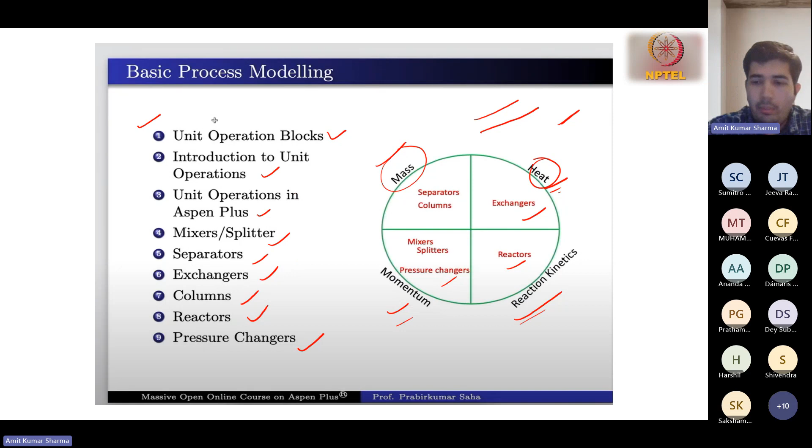This is the picture in which you can see the blocks. Just let me take you to the actual Aspen software. Let me share my Aspen screen.

Is Aspen visible to you? Yes, sir. Okay, thank you. So this is what you see when you open Aspen Plus, I'm using version 12. This is the window. Last time I was not able to access Aspen, but now I'm able to do it.

Let me first start with the help section, actually it's very important. You can see in the rightmost top corner there is an option for help. If you click on it, there will be a complete help section — basically a manual for the complete software. In this manual you can find help regarding any query, and you can also use it to understand more about the property methods, the simulation environment, and the blocks.

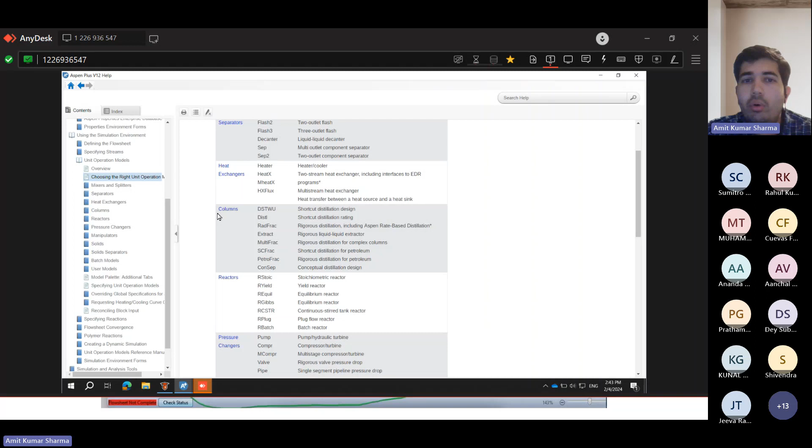Then separators, so we have different kinds of separators. Then heat exchangers, so you can get so much information about all these things. It's like a manual. Just click on mixer and you will get further information. Further, you click on it, then you get more information. So this is the help you can use.

So let's go to a new file. Here we can specify the components.

Just specify like air and water. You can specify any component here. Just type it if you know the exact name. Otherwise, you can click on the find button and find it here. You can find with molecular weight, you can find with boiling point. So you can do your find here.

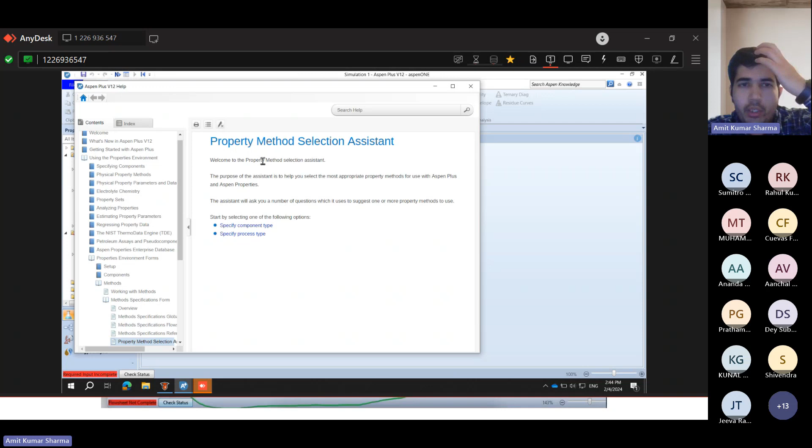After that, just click next. So then it will come to the next required input. Now you have to select the property method. This is the property method; you can also use the method assistant. If you click on it, it will ask you some basic questions.

Like if you're not sure which property method to use, you can use this property method assistant. Specify the component type or process type. If you know about the component, select this option; otherwise, suppose I know the components, you select this option. So suppose my component is a hydrocarbon system. Does this mixture contain petroleum assays and pseudo components? Suppose no, then you select further. These are the best options you can use, like Peng Robinson and others. If you click further, it will show you all the detail regarding it.

So if you're not sure about the exact property, you can use this method assistant. Just select your NRTL, okay, then next.

So now your property specification is complete. Now go to the simulation window.

Here you can see the model palette. At the bottom you can see mixer, F split, there is a model palette. Here you can see one is mixer splitter, then there is separator with different options, then exchangers, again different options, then columns, reactors. So in today's class we will cover mixer splitter, separator, exchangers, and columns.

So in mixers you can click on it, just drag it here, it will come here. Then you can connect with the material stream and all. You can see there are red arrows and blue arrows. The red arrows mean you have to connect a stream here.

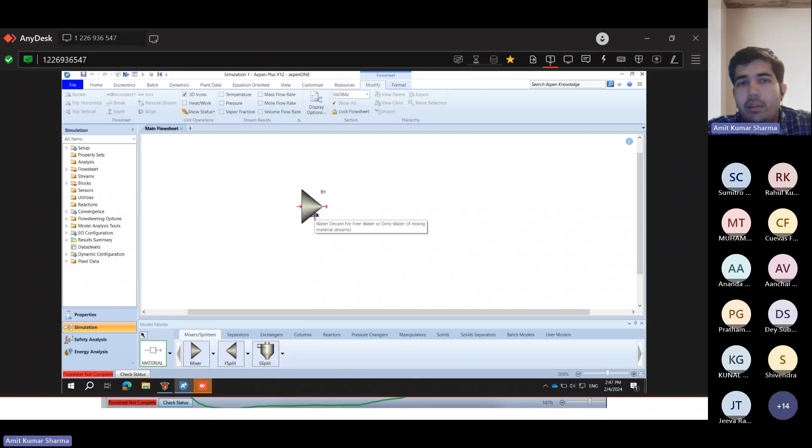If you go to this one, don't click it, it will show water decant for free water or dirty water, if mixing material stream. So you can separate some water decant here. So this is the basic model palette.

Let's go back again to our PPT. So you see here, these are the model palettes. We can use the model that we require. We can select multiple options, and we will go through some examples also.

So first, in week 2, we covered mixer, S-split, and F-split. The mixer mixes more than one stream and lets out one or two outlet streams. If there are two outlet streams, the second one is the decant stream based on density. So suppose you are mixing, if there are two outlet streams, the second stream, like the blue one I showed you, will be the decant stream.

The heavier liquid will go into the decant stream, depending on the density. In the S-split, it splits the flow based on only two outlet parameters: split fraction and flow. So you need to define the split fraction or flow. These are the only two parameters available in S-split.

But in F-split, it splits the flow based on various other outlet parameters in addition to split fraction and flow, such as limit flow and cumulative flow. So in F-split, we can also do limit flow, cumulative flow, and so on, but in S-split, we can only do split fraction and flow.

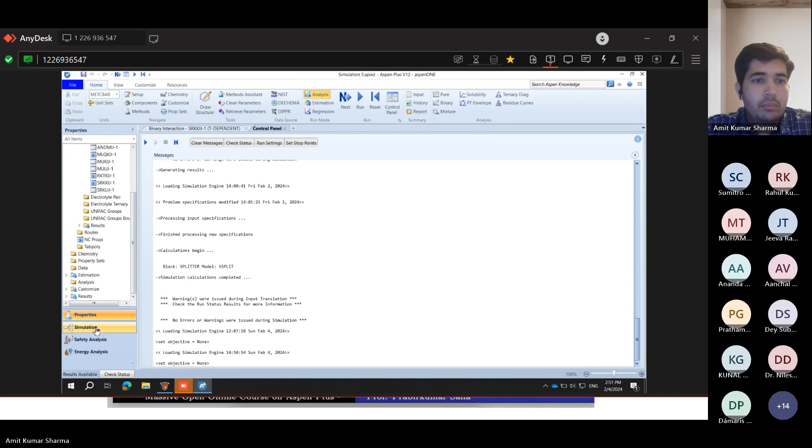This is the flow sheet. In this, we are using this mixer and then this as a splitter.

If you click on this stream, it will take you to the details, like what are the input variables, state variables like temperature and pressure. So here you can see the temperature is 80 degrees and pressure is 1 bar. This was given in the problem, 80 degrees, the temperature considered, and 1 bar like that.

So here you can see the total flow rate, which you can define here. Be careful with the basis of the flow rate. If you are having mass flow rate, there is an option for mass flow rate or mole flow rate, so you can change the flow rate option accordingly.

So if you are defining the flow rate here, you need to define the value, like for water mole fraction it should be 1. Or either you can define the flow directly here also.

Then if you press the next button, the input was already given. Go back to the main flow sheet and click on this benzene stream. For the benzene, you can see the value is 70 degree temperature, and the mass of benzene we have already given. Regarding the toluene, we have given all the inputs as given in the questions.

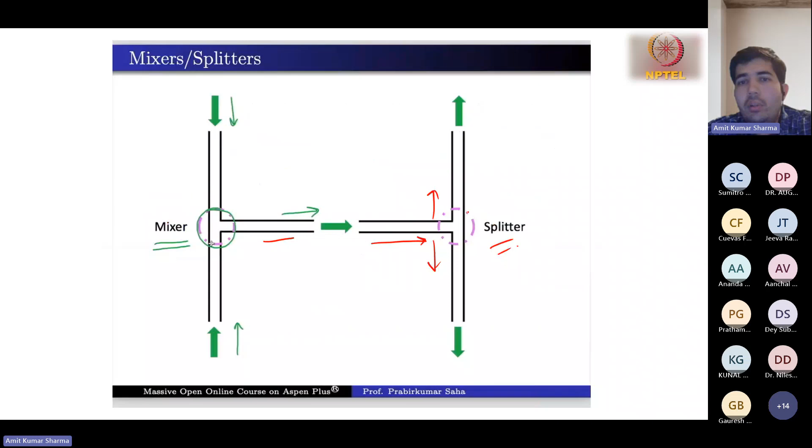So this fraction will also contain all three components, but it will be the fraction of the whole stream. Similarly you can also define the flow. Suppose this flow is maybe 3000 kg per hour, since each is 1000, so total will be 3000. Then you can define, I need 1500 kg per hour in supply line 1, 500 kg per hour in supply line 2, and remaining in storage.

So this splitter will split this mixed stream into these flow rates, but the composition will remain the same. This stream will also have 1:3:2, and this one too. So there is no change in composition, you are just splitting the mixed stream.

Either you can define it by the fraction or by the flow rate. But if you use the F splitter, you will have more options like limit flow, cumulative flow, and so on. Suppose your system is like this...

In this example, we have already fixed the flow rate, but in real conditions this flow rate can change. Suppose there is a shortage of water, so this flow rate comes down to 500 only, and due to that you want to maintain the same ratio, so you will also decrease the flow rate of benzene and toluene. But you have connected a component in supply line 1 that needs a fixed flow rate.

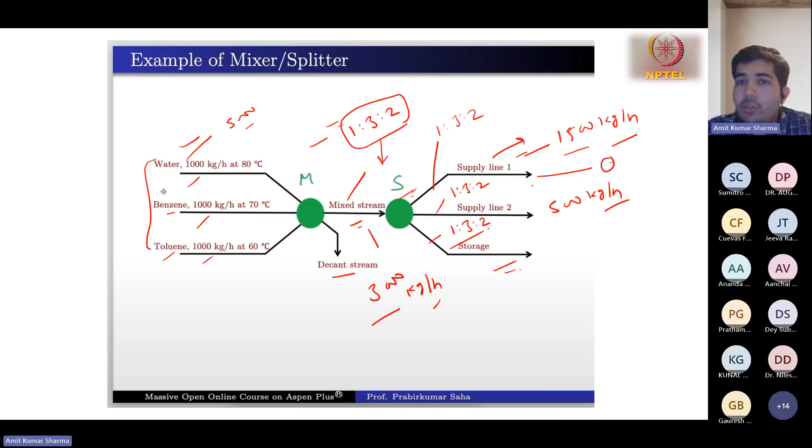If that component connected to supply line 1 doesn't have the fixed flow rate, it can get damaged. So with the F split, you can define that supply line 1 should always have this kind of flow. That will prioritize it. So you can define the cumulative flow using that option. Let me show you with an example.

So here we are using the S splitter. We only have the split fraction option and the flow option, only two options are there. Let me close this.

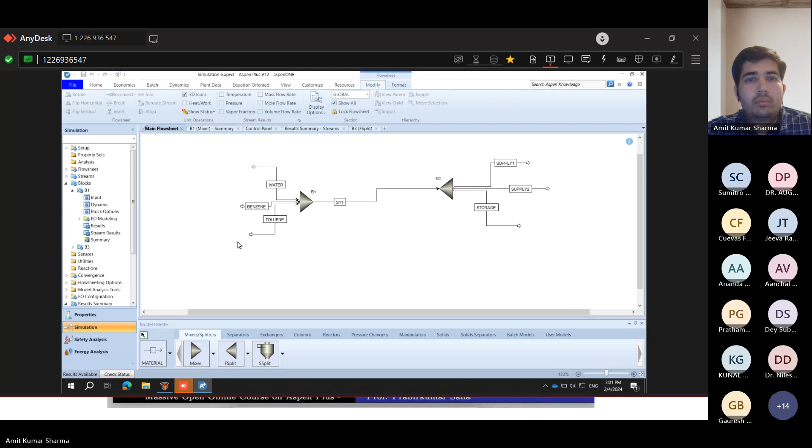Now we are having the same inputs, the same mixer, but now we are having the F splitter, not the S splitter. If you go into this, you have different options, like you have three streams: storage, supply 2, supply 1.

So you can define the limit flow, you can see the options here. In the S split we only had two options: split fraction and flow. But here you can see we have multiple options, so you can use these options as per requirement.

Now we are using supply line 2 limit flow, so it will limit the flow rate to supply line 2 to 1800 kg per hour. Supply 1 will have a cumulative limit flow of 2200, so it will be cumulative. First 1800 will go into supply 2, then the remaining 2200 minus 1800, so 400, will go to supply 1. And if there is still something left, that will go to storage.

So these kinds of things we can do in the F splitter, giving more control over the distribution of the mixed stream. You can either use the cumulative limit flow, the volume limit flow, the fraction, or the cumulative volume limit flow. You can also use the mass basis, mole basis, or standard volume basis as the basis for that.

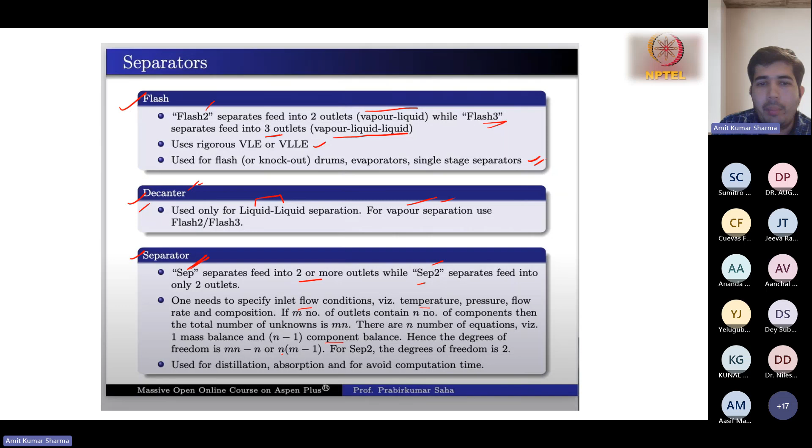For Sep2, the degree of freedom is 2, since it's only separated into 2 outlets. It is used for distillation, absorption, and to avoid computation time. So we will see the Sep models.

This is the example of the flash separator. So here you can see.

First you can see a mixer, where we are mixing the feed: 18% mole naphthalene, 26% mole toluene, and 56% mole water. Then you can see the air. This is vapor liquid liquid separation, where you are separating vapor and liquid.

So you have a problem. You have the inlet conditions. You know the outlet will be vapor and liquid. You know the temperature of this flash, the temperature and the pressure.

Now we will see the Aspen model for this.

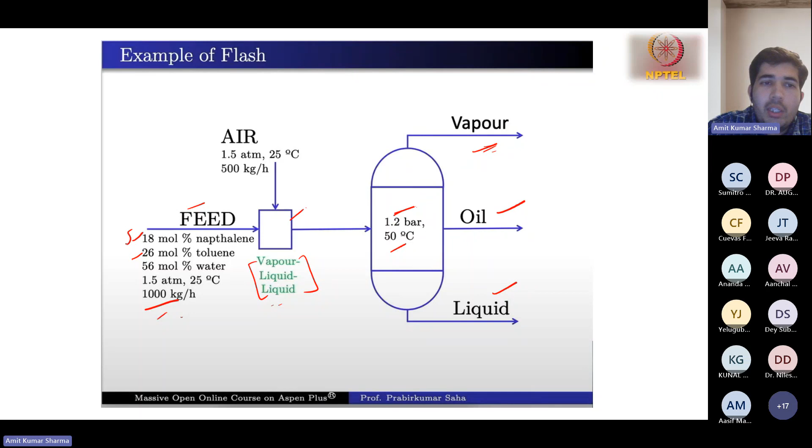So you need to define it as per that only. Define here the total flow rate basis as the mass flow rate. This is the flow rate, but the composition of this stream is in mole fraction, so you need to define the mole fraction. Always be specific about the composition basis and the flow rate basis. You can change this to mass fraction also, but that can change the result.

Yeah, Amit, want to say something? Yeah, please. Sir, please, in the starting, how to select the method, like NRTL and something else?

Regarding that, if you have a theoretical problem from a book, they will specify the method you should use. Or you can use the method assistant—Aspen has a method assistant you can use. Let me show you that example.

So when you go to the help, you can see the using the properties environment. This is the complete manual, so you can read this manual.

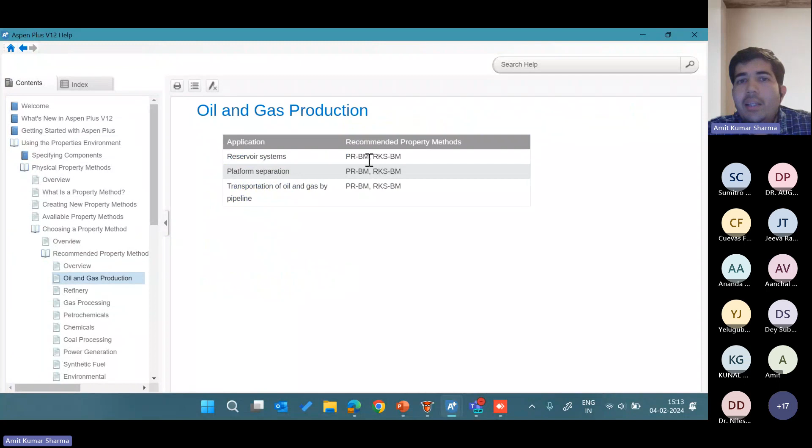Suppose I am working with oil and gas production, these are the recommended methods like Peng Robinson. It depends - if you're in gas processing and working with acid gas absorption with water ammonia, you should use this method. If you have gas dehydration with glycols, you should use this method. Aspen has a complete database of all methods and complete reasoning for the methods.

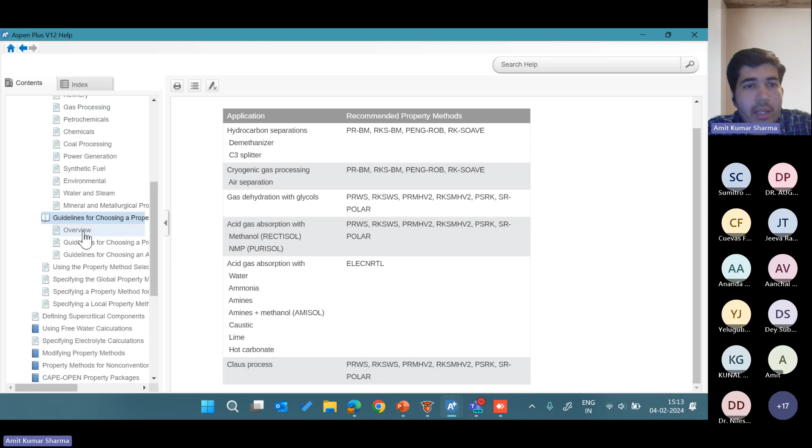There is also a guideline - see this type of guideline. It will ask you some questions, and once you answer them, it will automatically take you to the right method.

The second question is, after entering the component, estimate using Unifac for binary interaction finding. So what is the Unifac estimation? Are all methods only for NRTL?

No, it depends - actually I'm not from the chemical engineering background, so for more explanation you should take help from Aspen or online help. But Unifac is used if you want more interaction, like binary interaction, then we select Unifac.

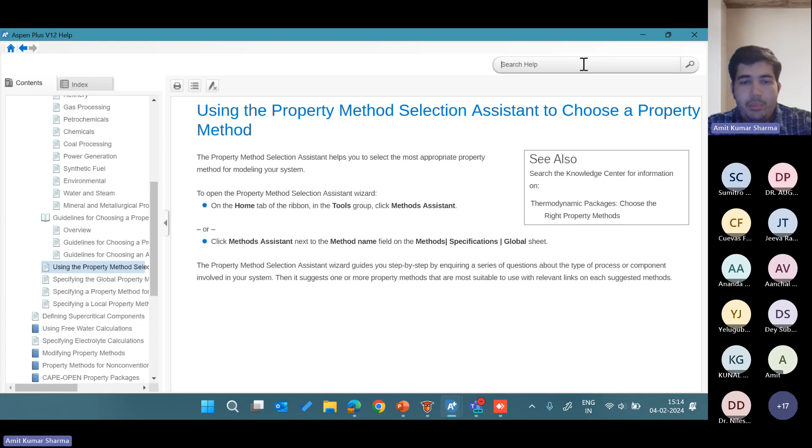So we can search here - yes, we have Unifac, like the Unifac activity coefficient model. So sometimes to know more about the activities of various components, we need to select the Unifac estimation, otherwise you will have different results.

So it depends on your problem. Actually I'm not expert in this field regarding when to select Unifac and all, so you can use this manual to find more detail. You can see the estimation input Unifac group sheet, where you can see all the reasons why we need to select it.

So we were on this problem. This is important - be specific about the flow rate basis and the composition basis.

Now we have used the mixer, so here we don't need to specify anything - it will automatically take the inputs. Then there's a mix stream.

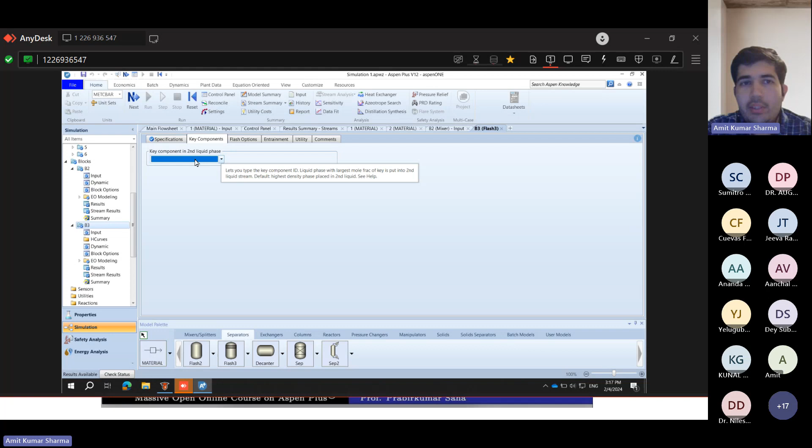Then there is a key component option - if you want to select key component second liquid phase, if you have more specification regarding your second liquid phase, you can select it here, like your key component in second liquid phase should be this, so you can define that. But now we don't want to define it. You have more options there - once you learn the basic things, you can use these further options for the complexity of your system.

Now if we run it - I think it was already run. You can go to the streams, and here you can see the results. You can see the mass flow and all - like 1000 kg per hour, 500 kg per hour, and there is this ratio.

Then this is the mixed stream - they are mixed together, the total flow rate is 1500. Then they are separated. See the water - the mass flow rate of water in stream 5 is only...

0.13 - this is stream 5, so it's only 0.13. It will separate components differently. In stream 6, you see the water is 147 and 428.8. So we have only used the inputs that we have given in the particular problem, and it will separate like that. You can use the inputs that you have in your problem and further specify the conditions.

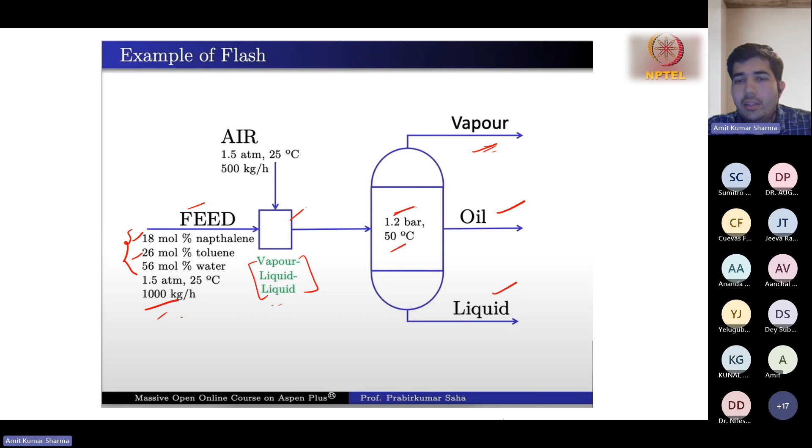Let me close this file. So, yes.

So, sorry to ask again, but where is the result button? Like, where you just click and you get the result? Okay, I can't understand. In this, I will show you.

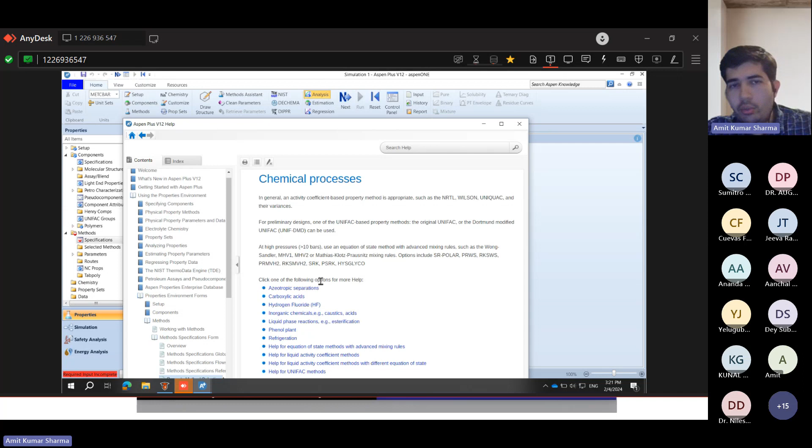Suppose you know the process, click on it and select what kind of process you are using. Suppose you are using chemicals, click on it, then select what kind of chemicals you have, and you can further use this assistant to know more about the method you have to use.

But as we have given already, apply NRTL property method, so just select NRTL — here is the NRTL, select it. Okay, so it's selected, then click on next. Then here it is defined.

So click on it, click next. Okay.

You have already, with this definition, defined the properties, defined the components, defined the method. So the basic requirement for any flow sheet is that you need some components and a method. You have already defined that, and it is successful.

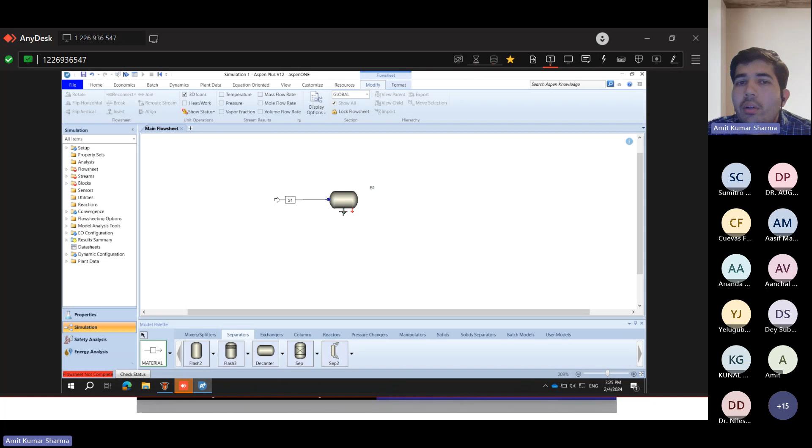Okay, so like material stream. Now you see three arrows are there, and all three are red. It means you need to specify all these three, otherwise your model will not run. So click on this, click on this, click on this.

Okay, so you have connected all three streams. Then just press the next button, the uppermost, or you can go to the home. Then here is the next, or on the top also you can see the next button, or you can press the F4 button. So click next.

So it will ask, see the S1. So it is asking about the S1, the material stream. You see this circle with half red, half white, so it means the input is incomplete. So you have given options like feed is 50% and 50%, 2000 kg per hour, and 30 and 1. You can define temperature is 30 and 1 bar is the pressure, and the mass flow rate. How much? It is 2000, yeah, 2000 actually.

So it's 2000 kg per hour. Okay, then you can define now. See, we have given the weight percent. Then you need to define the mass fraction. Okay, yeah, it's mass fraction. Then it's 0.5, then it's 0.5. Okay, then click next. So now it will ask you about the decanter.

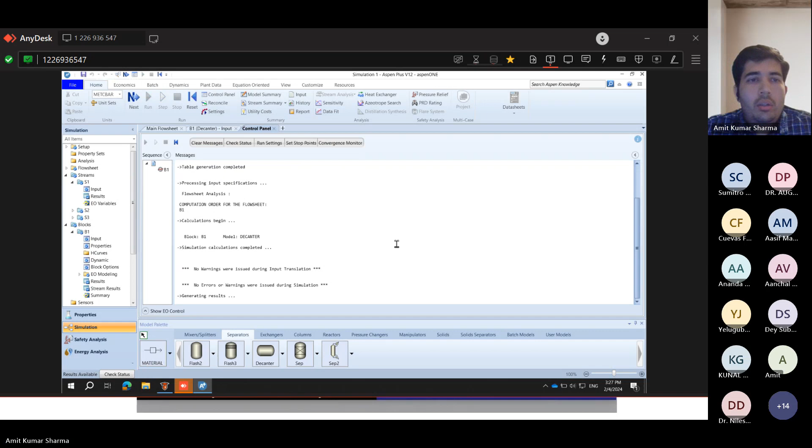So you can see all is blue, and at the bottom result is available. Now see the left corner. In the left side you can see this window, left window. So here you can see this, like the block B1 is a decanter. Here you can see the stream results. You can click on it. So here we can see the stream results.

Okay, so these are the results that you were asking. You can see here, or you can also go to the results summary. This section you can also go here. Here you can also see the streams result. You can see the run status. Suppose if you have any error, then you can go to the run status and it will show you the calculation were completed successfully, and it will show you the time and all basic things. Okay, in the status button it will show you the message. If you have any error, that will show you here.

Okay, or streams, you can see the results here, or directly in this block. Like if you go to this particular block stream result, then it will show you only for that block's result. If you go to this result summary, then it will show you for the complete flow sheet. Suppose as of now we only have one block in our flow sheet, so both will show you the same result. But if I have multiple blocks, then if I want to check the overall result in one sheet, so then I have to go to result summary.

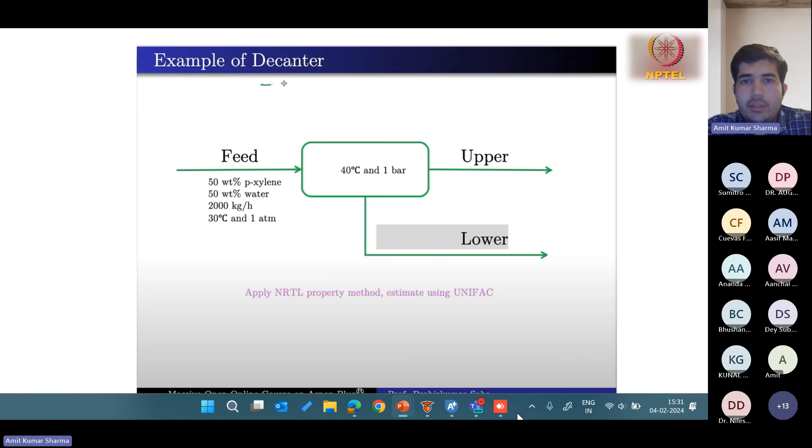Okay, so this is the basic working with Aspen. You can select a property method, you can select the components, you can select the model from the palette, and you can give the inputs. You can use the inputs that have been given, and you can play with more inputs if you want, and you can see the results.

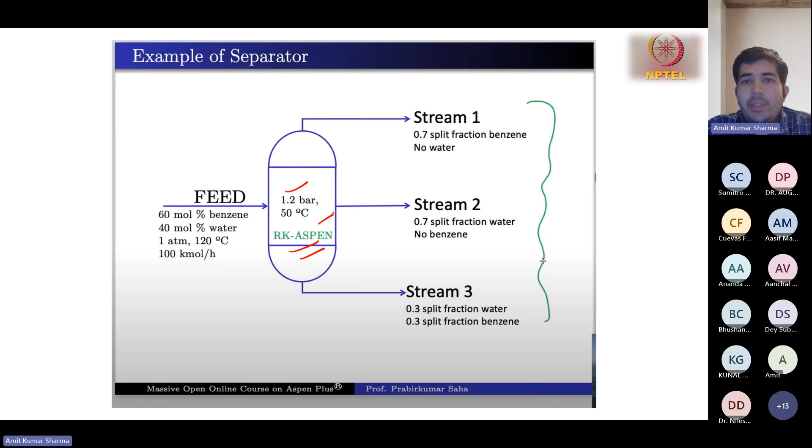We have given 0.7 split fraction benzene and no water. We have given the conditions also, like stream 1 will have 0.7 split fraction. So we have a feed, it's a mixed stream. So the 0.7 fraction will go into stream 1, and it will not have water. Then it will not have benzene, and it will have 0.3 water and 0.3 fraction benzene. So let's see this example.

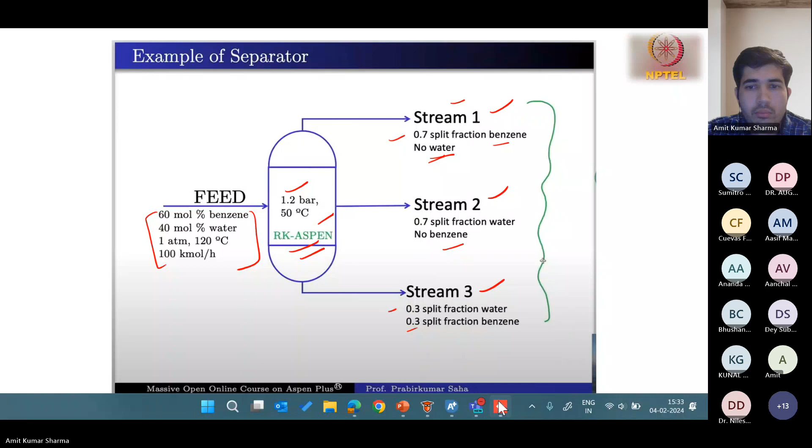Okay, it's a different one, I think, no? Okay, we will look into it later actually.

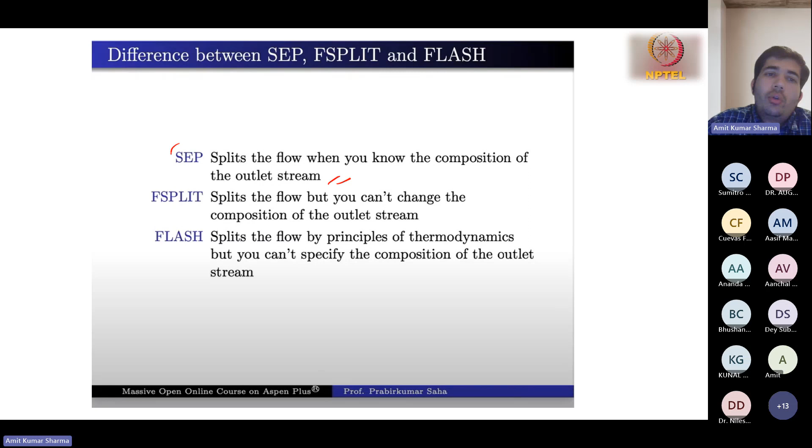Let's go further. So what is the difference between this separator, F split, and flash? The separator splits the flow when you know the composition of the outlet stream, so you need to use a separator when you know the composition of the outlet stream. The F split splits the flow, but you can't change the composition of the outlet stream. F split will only split the flow, but you cannot change the composition.

In the flash, it splits the flow by principle of thermodynamics, but you can't specify the composition of the outlet stream. So in this, we can't specify the composition. In the separator, we can specify the composition. Okay, like this, so this is a separator.

So we have already specified, like stream 1 should have benzene and no water, it should have no benzene, only water and 0.7 split fraction, and this should have both water and benzene. So in separator, it will be the same. Because we have one input and three outputs.

If you use the SEP2, then there will be only two outputs. This is a SEP model. So you can see we have control over the stream, we can define it should contain no water, it should contain no benzene, like that. So this is the major difference.

So separator, you know the composition of the outlet stream. F split splits the flow only, and can't change the composition of the outlet stream - it will only do the split fraction, mole fraction, like the flow, like that only. The flash splits the flow by principle of thermodynamics - you can't specify the composition of the outlet stream, it will use the principle of thermodynamics and separate the compositions.

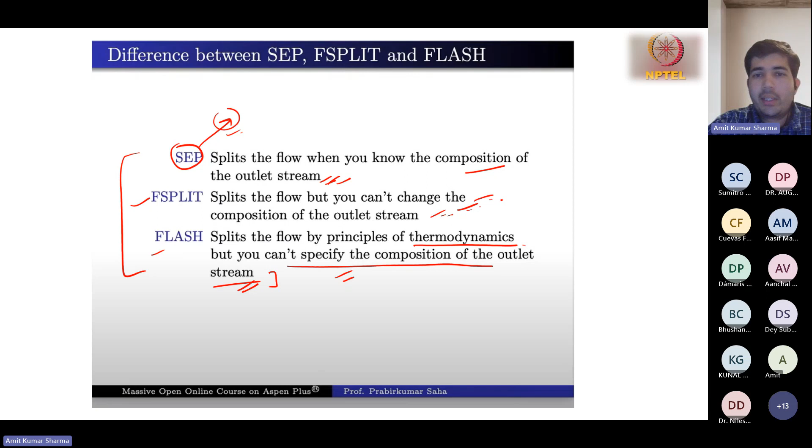Now the heater: one outlet heat stream can be specified for the net heat load from a heater, and there may be multiple inputs to the heater. If only one specification like temperature or pressure is given, the heater uses the sum of the inlet heat streams as a duty specification. And if two specifications are given, the heater uses the heat stream only to calculate the net heat duty. So this is the basic about the heater. You can also find these details in the Aspen manual from the help section - if you go to help, go to the simulation environment and go to the details about the unit models. If you go to the heater, you will find all the details.

So this is a basic example. Here you can see we have two streams, one is benzene and one is water. Water is at 300 degrees and the flow is 600 kg per hour at 10 bar. Benzene is 30 degrees and 6000 kg per hour at 2 bar. You can see the water is at higher temperature and the benzene is at lower temperature.

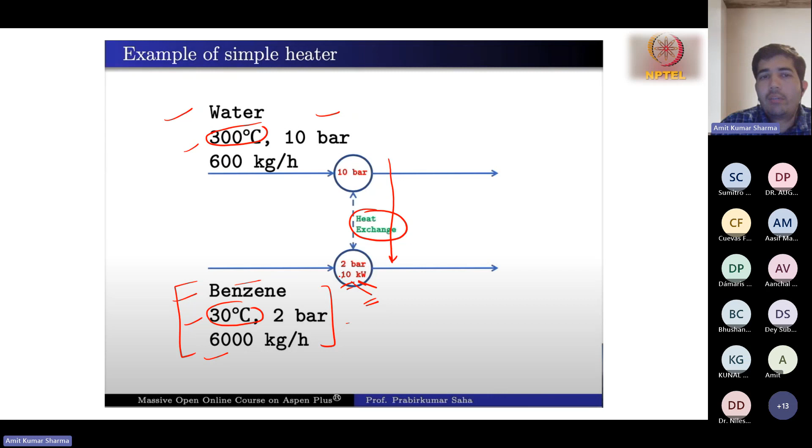So if we have a heat exchanger like a heater, it will take the heat from this water and give it to the benzene, so there will be a heat exchange. We have given this condition, like 2 bar and 10 kilowatt. So we need to give the heat duty to benzene at 10 kilowatt - we want to give 10 kilowatt to this benzene stream. So we have specified here, the duty is 10 kilowatt. So now basically we need to extract 10 kilowatt of heat from this water stream.

Go to the Aspen. So here you can see the results. We have a water stream and a benzene stream. So the input, this is only benzene. You can define the inputs for this stream as given here. You have the flow rate, you have the pressure, you can define these.

Directly go to this heater option. If you go to the heater section, you see the input. You have options to specify. So the specification, you can choose like pressure, temperature change, pressure drop correlation parameter.

So here we have given the pressure and the duty. We use the pressure and the duty. We have specified the pressure will be 2 bar and duty will be 10 kilowatt. You can also change the unit from here. You have multiple options. Then you don't need to define anything else, just define this.

For this also, we have two heaters, one is here and one is here. Here we have both the pressure and heat duty, and here only we have pressure. So just define only the pressure. You define the 10 bar. So let's run it.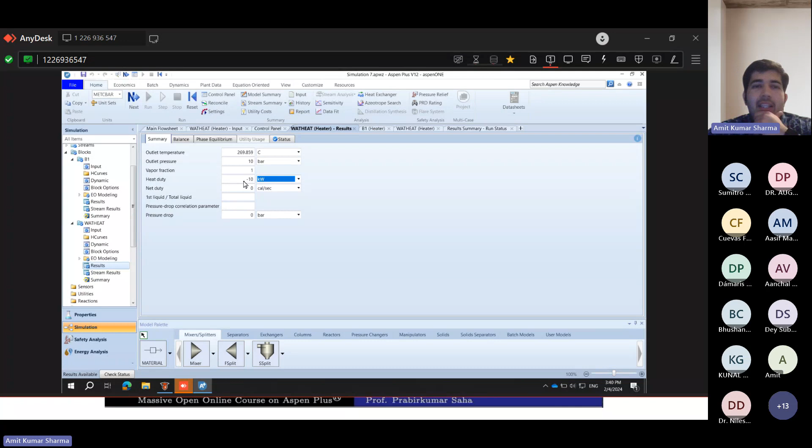So minus 10 kilowatt is going from this stream, so this heater is giving minus 10 kilowatt. Minus is representing the output, so outlet. Sorry, the heater is supplying the heat, and the block B1 is taking the heat, 10 kilowatt. So this heater is giving 10 kilowatt of heat to this one.

And you can see the temperature difference. It's like input is 30 degree. So due to this 10 kilowatt heat, the output stream is B1, so this benzene out.

Go to the result summary, go to the streams. The result for this benzene in and benzene out. See, the temperature was 30 degree at the input, and the output is 33.34. So that 10 kilowatt heat increased the temperature by 3.34 degrees centigrade. And for the water, the input was 300 degree and output is 269.8. So temperature is decreased, meaning the heat is releasing the heat to this benzene.

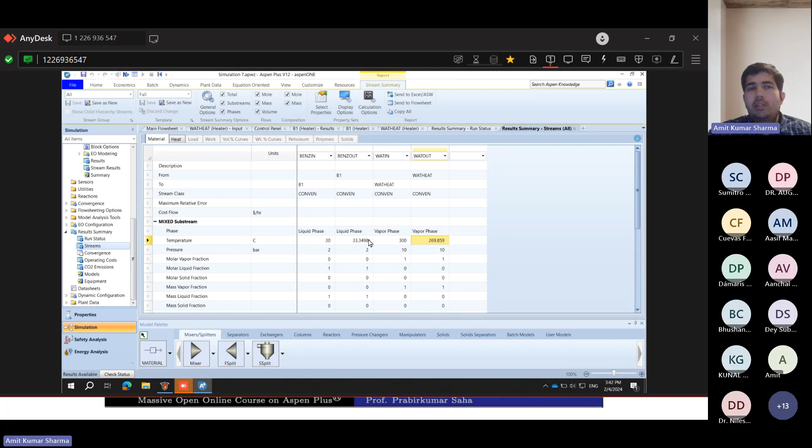Any doubt? No, sir. Okay.

In this way, you can use this simple heater. Now we also have a HeatX. So as you go to the Aspen, in the palette of the exchanger, we have heater, we have HeatX, we have MHeatX and HXFlux. So we have multiple options. We have now seen the heater. Now in HeatX, what is about the HeatX?

So HeatX can perform both simplified as well as rigorous rating calculation. The previous calculation was very simple. In that we didn't have to define any fin sizes, any geometry of exchanger, nothing. We are only specifying the heat duty or the pressure and such things, so it's a simple calculation.

But in HeatX we can do rigorous calculation. For rigorous calculation, the geometry of exchanger must be known. So HeatX can perform the following: full zone analysis, heat transfer and pressure drop calculation, sensible heat, nucleate boiling, condensation film coefficient calculation, built-in or user-specified correlation. It has some built-in correlations and you can also define some correlation.

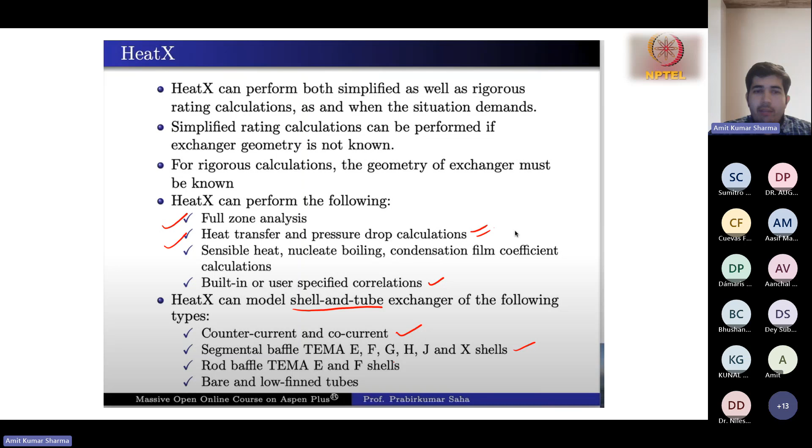HeatX can model shell and tube exchangers of the following types: counter current, co-current, segmental baffle like TEMA E, F, G, H, J and X shells, rod baffle, TEMA E and F shells, bare and low fin tube. So these are some types of heat exchangers available in the market.

So the HeatX can perform the calculation based on these types of exchangers, and you can do the rigorous calculation also, we will look into it. HeatX cannot perform mechanical vibration calculation and estimate fouling factor, these are the limitations of HeatX. It cannot do the mechanical vibration analysis and fouling factor. And one of the following specifications has to be selected for HeatX.

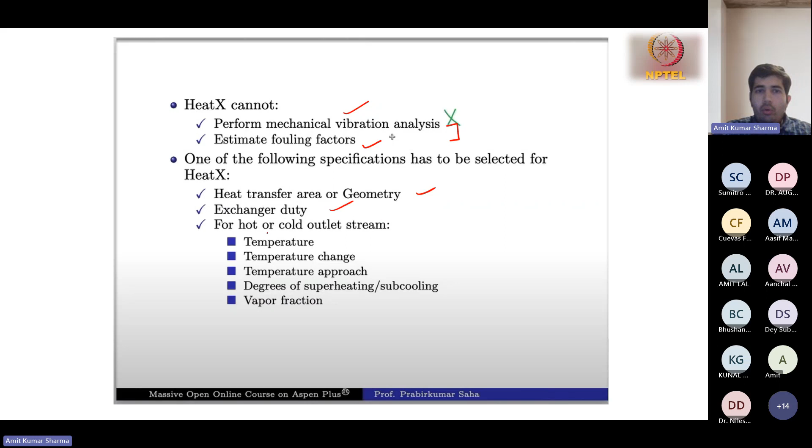When you are using the HeatX model, you need to specify either the transfer area or geometry, exchanger duty, hot or cold outlet stream, temperature change, approach, degree of superheating, cooling, and vapor fraction. You need to select these kinds of specification for your heater. And then there is MHeatX.

Unlike other unit operation blocks, MHeatX is not simulated by a single computational module. Aspen Plus generates heaters and heat streams to represent the multi-stream heat exchanger. So it is actually a multi-stream heat exchanger where we can use multiple inputs and multiple outputs.

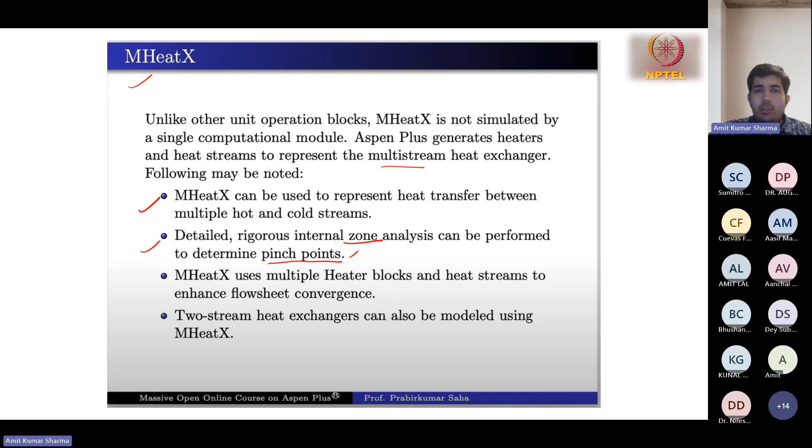MHeatX can be used to represent heat transfer between multiple hot and cold streams. So if we have multiple streams, we can use MHeatX. It can do detailed, rigorous internal zone analysis and determine the pinch points. MHeatX uses multiple heater blocks and heat streams to enhance flow sheet convergence. A two-stream heat exchanger can also be modeled using MHeatX. If you only have two streams, you can model that with MHeatX, and if you have multiple streams like 4 or 6 streams, you can also use MHeatX.

If you go to the Aspen, let me show you.

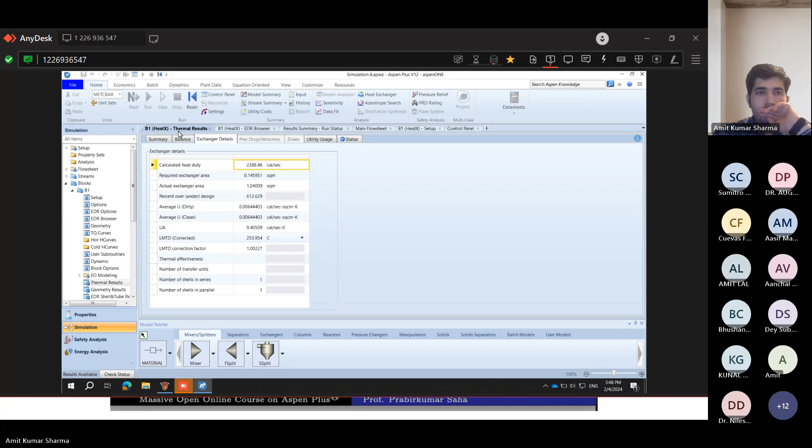If you go to the exchangers, suppose I have already modeled this, but let me select again, new block. If I click on material, you see there are 4 options.

Here you can see we have water input, benzene input, and then we have ethanol input and toluene input. So just give me a moment.

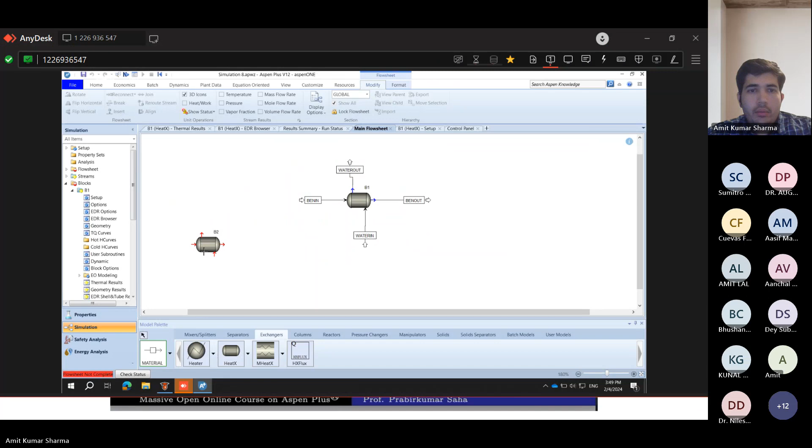So this is the example of the HeatX. Here we have 2 inputs, benzene and water, then we have benzene out and water out. So it's a different example.

It's for the HeatX, not MHeatX. We have only two streams, one is the water. Let's see the water specification, it's 300 degrees centigrade, so this water is the hot fluid. This benzene is 30 degrees centigrade. This is actually the previous example.

If you go to this example, the previous one, we did this example with the basic heater. Now we are doing the same example with the HeatX, using the same example but with the HeatX.

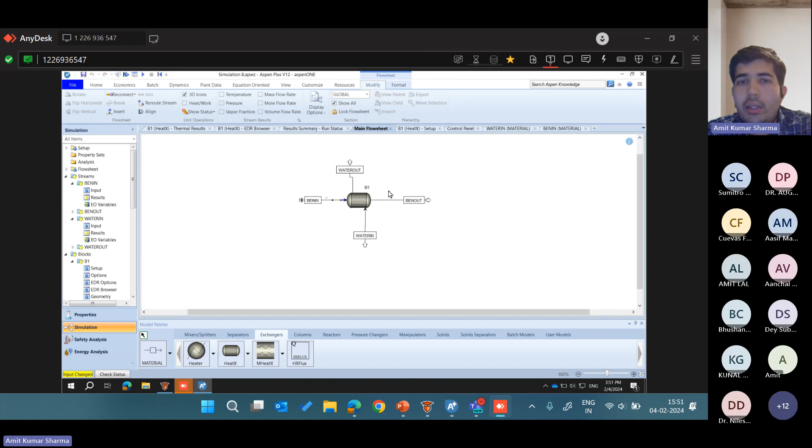So this water, benzene out and ben out. The options available in this heater are important. You can define what kind of model you require, like shell and tube, kettle reboiler, air cooled. You can define the hot fluid should be on the shell side or tube side. You can define the calculation type like rating calculation, design, simulation. Then you can define the exchanger duty, we have given 10 kilowatt, so we can define 10 kilowatt.

You can directly use the shortcut one also. If you use shell and tube, it will do a detailed calculation. You can specify the geometry also. Suppose if you click on size exchanger, it will show you some size details.

See, here you can do all the designing part. You can choose the OD, you can choose the pattern like triangular or fin patterns, you can choose the baffle types. So you can choose multiple things, define all the parameters, then accept the design, and then you can do the calculation.

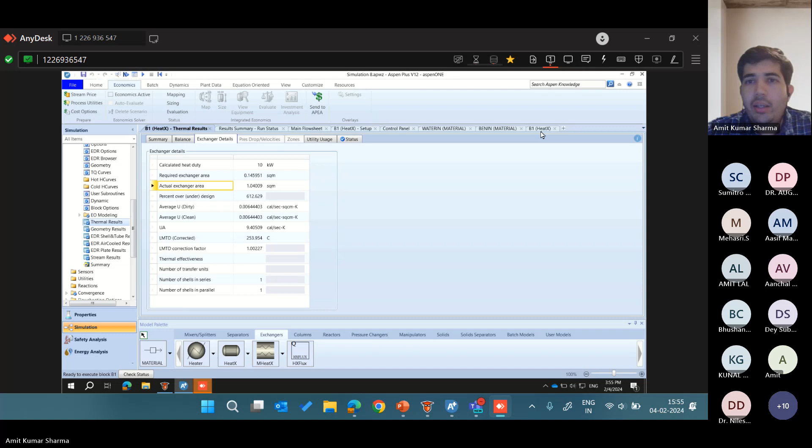So with the heater model, it was a very simple or shorter calculation, but with this HeatX we can do a rigorous calculation. We can design the exchanger, we can know the actual area, we can know the required area, we can change the design, we can change multiple parameters, and in that way specify geometry, specify size, change like kettle reboiler, and do multiple things. So this is the HeatX actually.

Okay, any doubt regarding this heater and HeatX? Okay. I think now we should move to the questions. Then if time is left, we will do some more problems. Let's move to the questions.

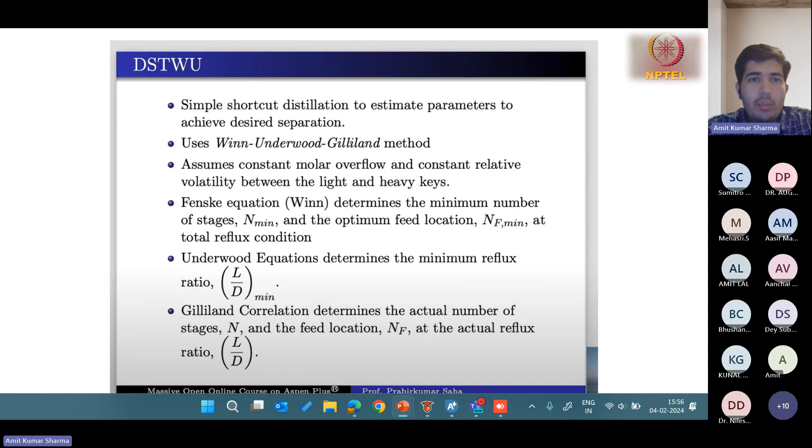So further we have covered the HeatX, so the example you can try it. Then we have some columns also. In this distillation column, we can have some feed, we can do the distillation, we can use the reflux ratio. We can define this in the model, and we can change the reflux ratio, change the recovery and all, change some more parameters. Go through these models and try it.

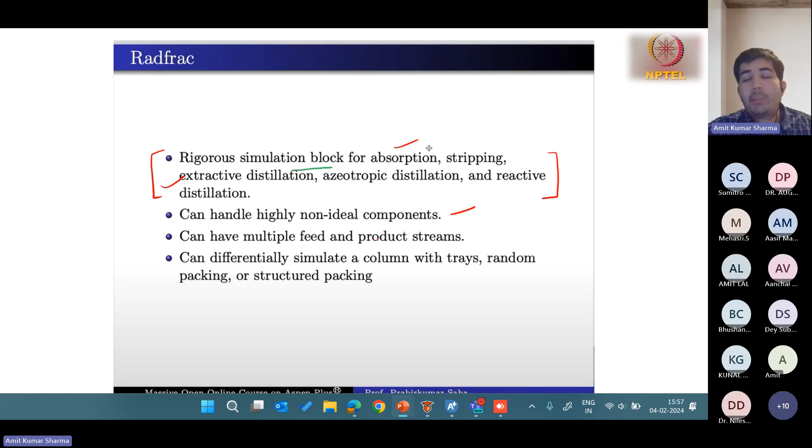Then RadFrac is important. The rigorous simulation block for absorption, stripping, extractive distillation, azeotropic distillation, and reactive distillation. So in the columns, RadFrac is a rigorous model, so you have more control over this. You can do absorption, stripping, extractive distillation, azeotropic, and reactive. It can handle highly non-ideal components, can have multiple feed and product streams, and can rigorously simulate a column with trays, random packing, or structured packing. So basically you can define different kinds of packing in the column, different kinds of structure with trays and all. So in this, you can do the rigorous calculation in RadFrac.

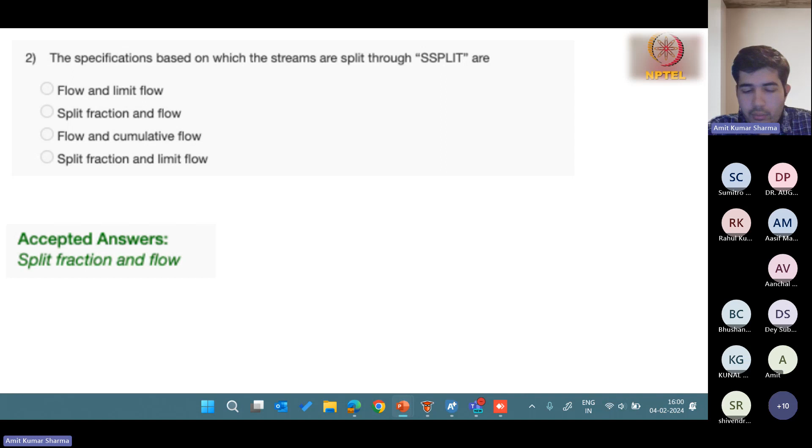So whenever you see 'is' and 'are', remember that multiple options may be correct. So go through all the options before giving your answer.

Sir, mass fraction, mole fraction, and volumetric flow. So we have one answer: mass fraction, mole fraction, and volumetric flow. Anybody else? Okay, so it will give you only the mass fraction and mole fraction.

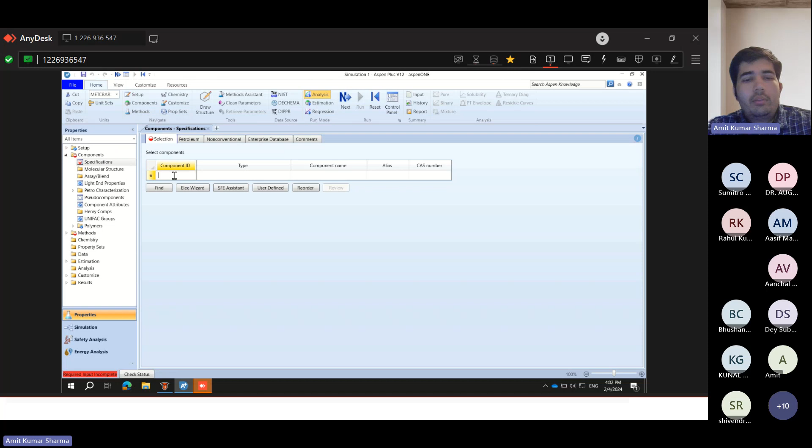The volumetric flow, this thing will come into play, or we can go to Aspen and see regarding this. Let's open an example. Suppose we have air and water.

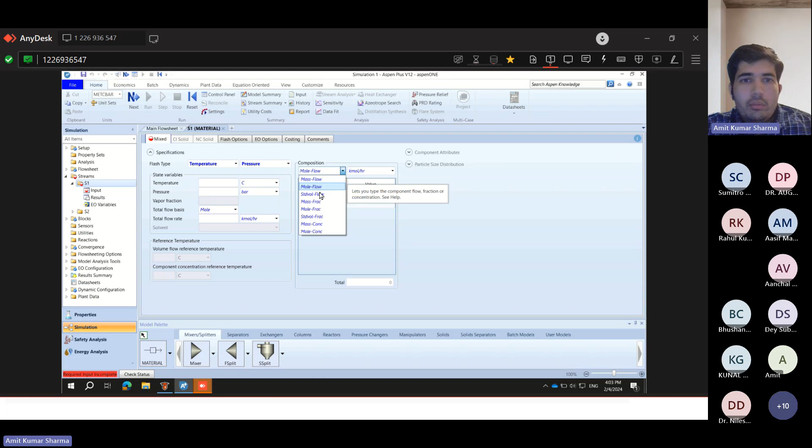It can be here actually. So the volume flow is here. Okay, mass, mole, standard volume, and volume.

So the option that will appear in the drop-down menu is indicated by the green colored ring C. So what will be the option in this C? Mass, volume, standard volume, and weight. Which one? Mass and volume.

Okay, mass and volume, standard volume - mass, volume, and standard volume. So we have two answers now. Anybody else?

If you have Aspen, please go there and check this option. Okay, so the correct answer is mass, volume, and standard volume, as we can see it's mass, mole, standard volume, and volume. So there is no option for weight actually.

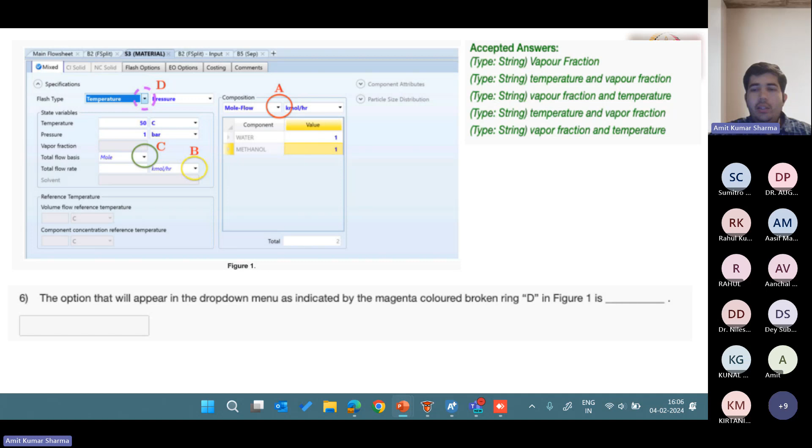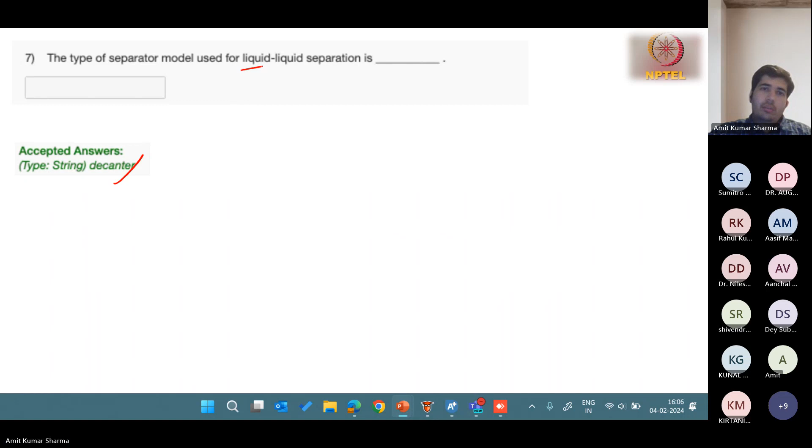The type of separator model used for liquid-liquid separation. Decanter. Okay, think about it - decanter. And what will be the basis of the separation? Density. Okay, so yes, the decanter - we can separate two liquids with a difference of density using a decanter.

The outlets of model Flash3 are: one vapor one liquid, two vapors one liquid, one vapor two liquids, or two vapors two liquids? One vapor, two liquids. Yes, because it's Flash3, so one vapor, two liquid.

Then, the model SEP is a component separator - true or false? True. Okay.

And how many output streams can we have in the separator, in model SEP? Multiple output. Multiple outlets. Yeah, multiple outlets. Okay, so it's true.

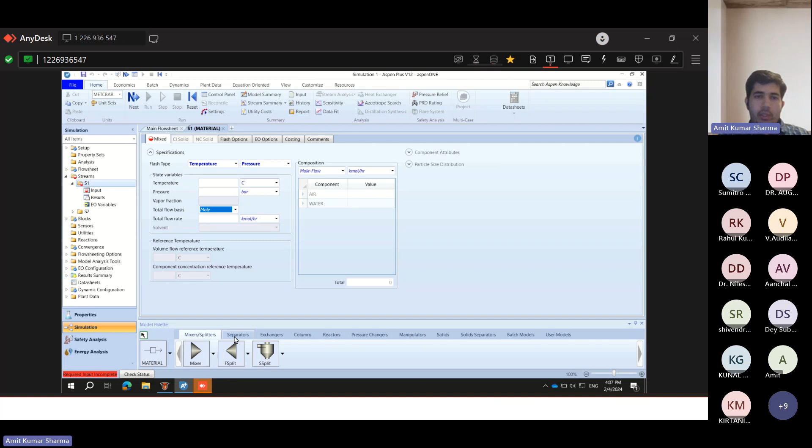The model block HXFlux is used to calculate - so we have a model block here, this HXFlux. What is the purpose of this HXFlux? The overall heat transfer coefficient calculation. Okay, so basically from this HXFlux, we can calculate the overall heat transfer coefficient.

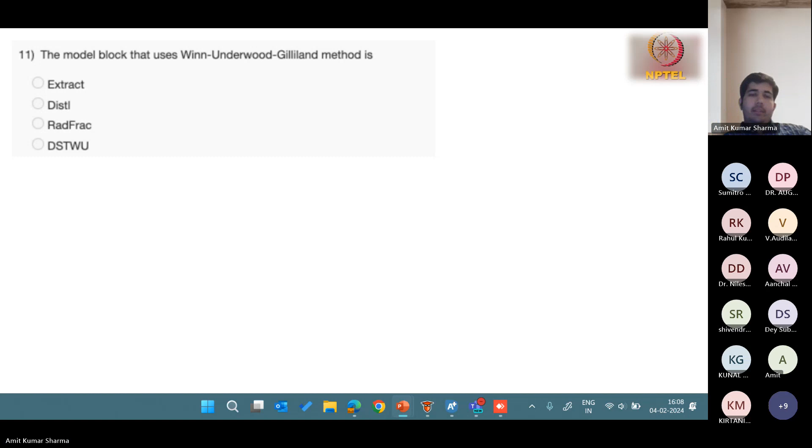The model block that uses the Winn-Underwood-Gilliland method is which one? Which model uses this method - Extract, Distl, RadFrac, or DSTWU? RadFrac. Which option - one, D? Option D. Yeah, so DSTWU uses this method.

For more detail, you can refer to the Aspen help also. Why does this model use only this method, and what is the purpose of this method? You can refer to Aspen help. So DSTWU and Distl blocks are useful for obtaining column parameters and provide accurate results.

True or false? False. Why?

Sir, it provides only first approximation results. Okay, and then how will you get the accurate results?

Simulating the results obtained from these models and performing the simulation on RadFrac. Yes, correct. So basically these models can do the initial or preliminary calculation, and from that you get basic results. You can use those results in RadFrac to do rigorous calculation to get the exact design, number of stages, packing, and all the parameters for that column. But for initial calculation, you can use these methods. So it's false, it will not give you the accurate result, it will give you the approximate result. For accuracy, you can use RadFrac.

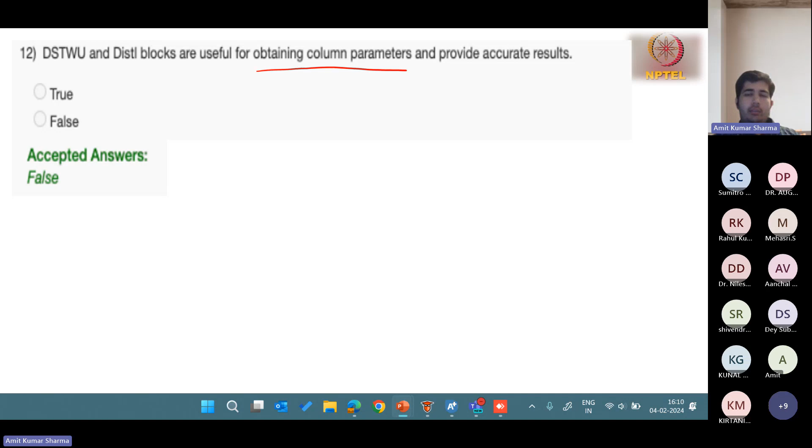The type of distillation which is not performed using the RadFrac model: azeotropic, multi-component, extractive, and reactive. Good question.

And how many, if anybody is from chemical engineering, would like to explain the meaning of azeotropic, extractive, reactive, and multi-component distillation, please explain. Anybody?

Okay, if you go back to the RadFrac model slide, yeah, this is RadFrac. So you can see it's suitable for ordinary distillation, absorption, reboiled absorption, stripping, extractive and azeotropic distillation, suitable for two-phase and three-phase systems in equilibrium mode. Okay, so these are the specifications, it's useful for these kinds of conditions.

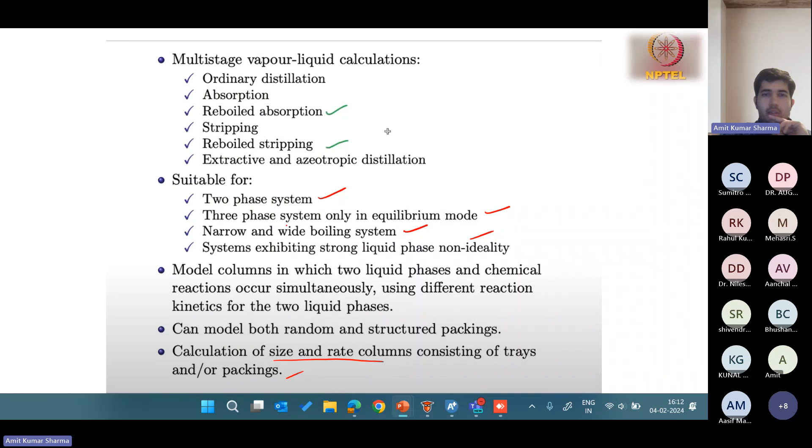Okay, so maybe now you can answer this. Yeah, anybody? The correct answer is multi-component.

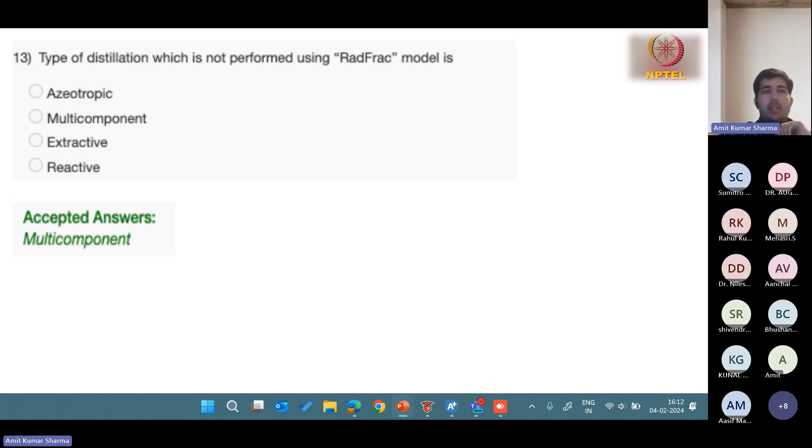So for multi-component distillation, RadFrac cannot do it. It can do azeotropic, extractive, and reactive. Multi-component distillation is quite complex and very difficult. I think you need some different kind of modeling. We have more options in Aspen, so you need to use that. In further classes we're going to look into those also. RadFrac can do azeotropic, extractive, and reactive distillation.

So the second outlet stream of a mixer unit in Aspen Plus is called the decant stream, yes. So the main one will be the mainstream and the second is optional, that is the decant stream.

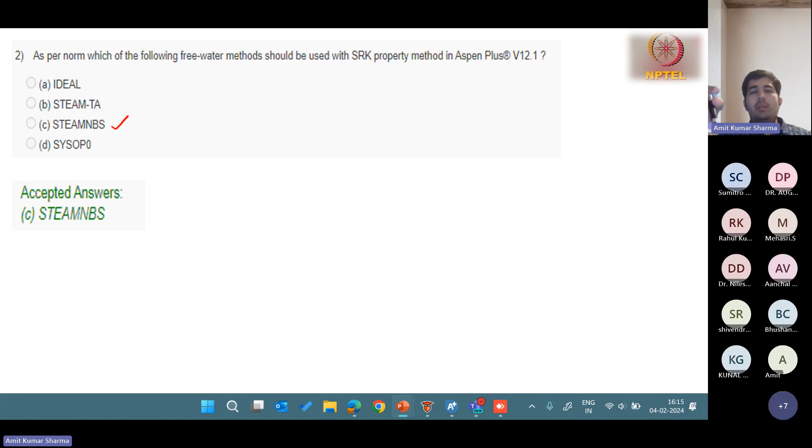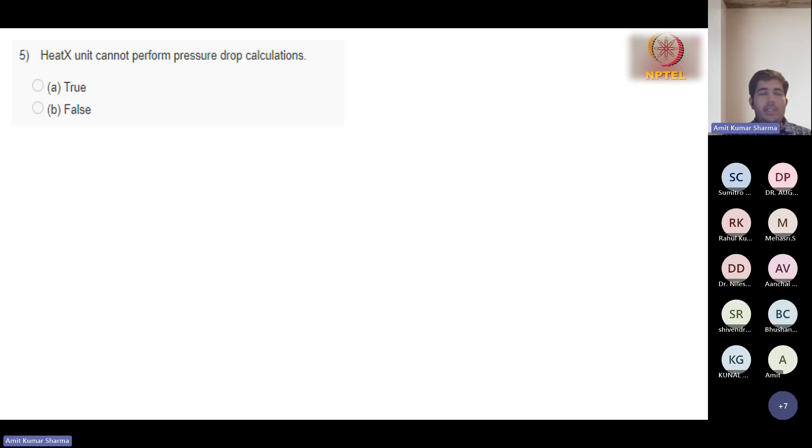But your temperature is also changing in the normal heater, no? Because that's also giving you heat exchange and you can apply heat duty there. So temperature is also changing in the heater, the basic heater. But what is the difference in HeatX? It can also do the pressure drop calculation.

Just think about it. You know the answer, I know.

So basically in HeatX, we can do the rigorous calculation. Now anybody want to tell the answer why with the rigorous calculation we can do the pressure drop calculation?

We discussed about we can change the area. Is it triggering something in your mind? We can change the fin size, we can change the tube length, we can change the design, we can change the geometry.

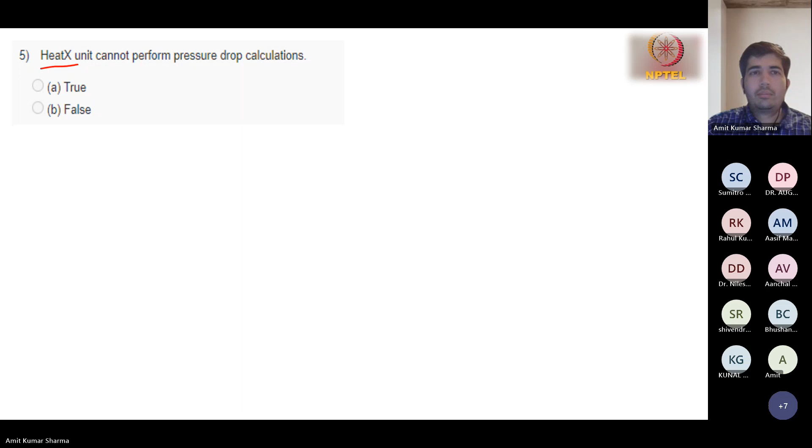Okay, so false. We cannot do, still do the rigorous calculation, but still we can perform the pressure drop calculation with this. Okay. But what is the difference in HeatX and the heater? So in HeatX, we can do the rigorous calculation. We can define more parameters in that.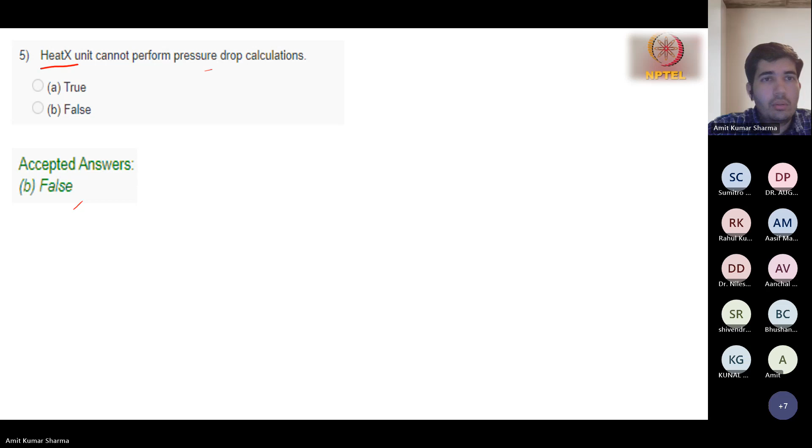So now we have a question. Anybody wants to try it?

By pen paper or no, no, Aspen Plus. No, no, we are in the Aspen Plus software class. So actually, Aspen is not working. I had told you that I did install it. I got some issues in installation.

I think last time in last class, one of you was telling that use the system in the username and like that section. I think that will work. Have you tried that? Yes, I tried, but I don't know. I didn't found Aspen's license manager in the Windows search bar. Okay, I don't know what is happening there. I informed to NPTEL team, but they didn't respond.

Yeah, then put in a reminder. And I think in last class you all also formed a WhatsApp group. Maybe you can also ask help in that group. I asked in the group actually, but no one responded. Okay, so somebody can try this. Is anybody having Aspen in your computer, like in their computer?

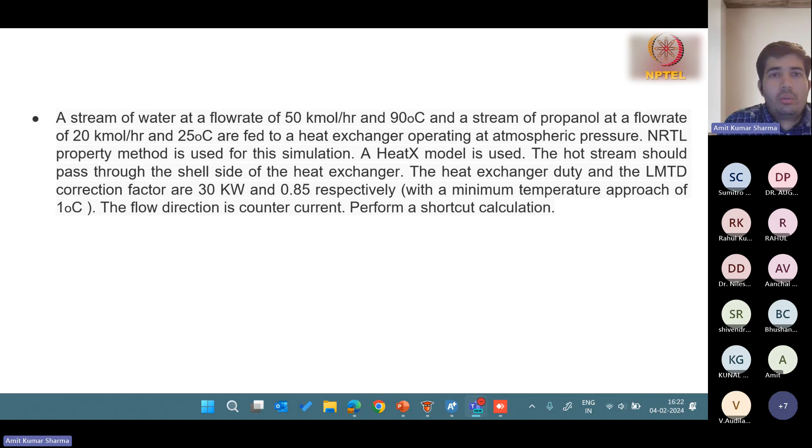So we have defined here, whenever you have a problem like that, first read it carefully. So we have a stream of water at a flow rate, we have given a temperature, and a stream of propanol with a flow rate.

So heat exchanger operating at atmospheric pressure. We have also given that you have to use the NRTL property method and you have to use the HeatX model. And the hot stream should pass through the shell side of the heat exchanger, and the heat exchanger duty and the LMTD correction factor are 30 kilowatt and 0.85 respectively.

And you have to use a minimum temperature approach of 1 degree. The flow direction is counter current. Perform a shortcut calculation. So go through each point. In each point, you have given some details. Use these details in the HeatX model.

So your first step should be, first of all, you need to define the components, water and propanol. Then define the method, NRTL. Then define the HeatX model. Then just put these data, flow rate, temperature, pressure, and all things.

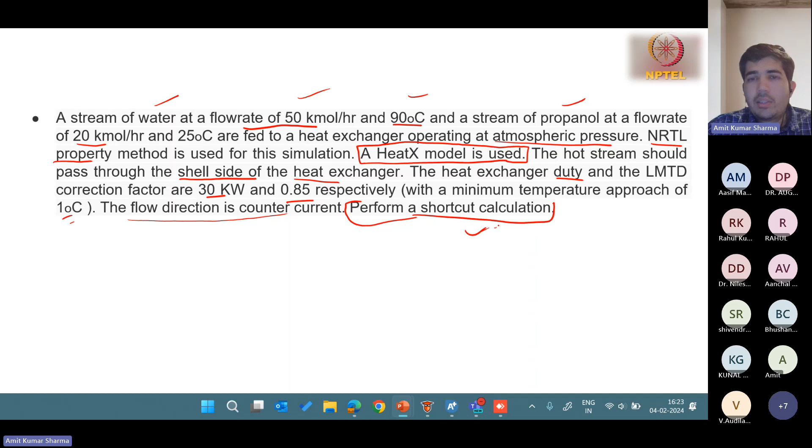Then you need to see what are the options available in HeatX model. Because in HeatX model, you can also do the rigorous calculation, you can do the shortcut calculation. So based on that, you need to identify as per your problem and select a particular option and then do the calculation. So now we can also start it.

The components are water and the propanol.

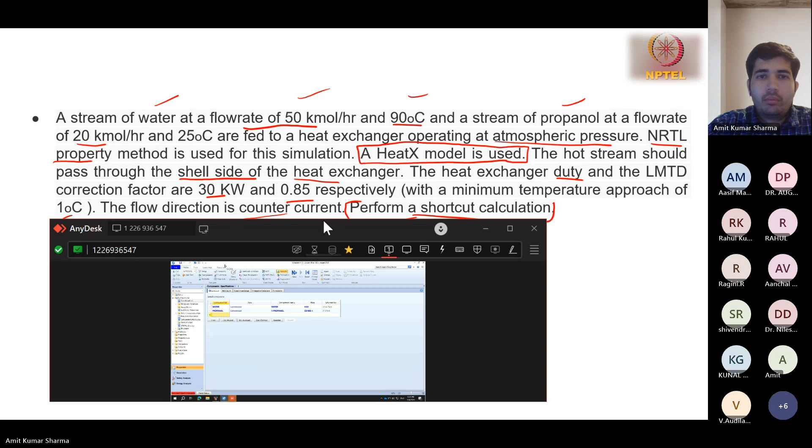Sir, extended. Actually, I have written all the values, so I can tell you. Okay, you have written the values. Okay, it's good.

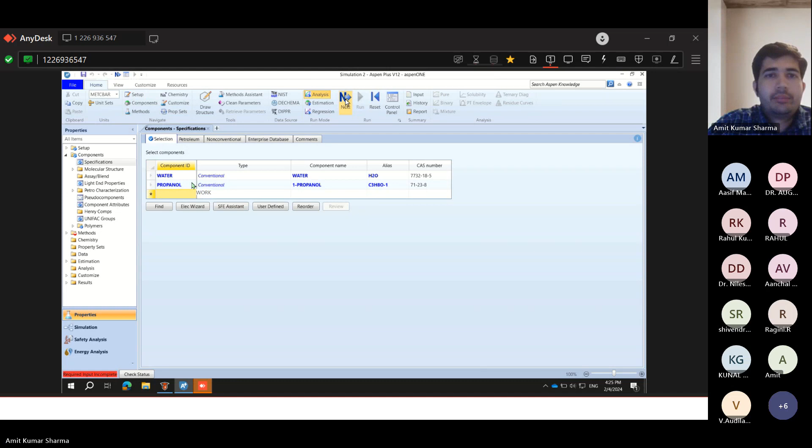So now you have selected the components, water and propanol. Then click next. Then we have given the NRTL method. So go to the NRTL. So when you select the NRTL, then it will automatically select some of these data, see.

And I think the one question was the Steam NB, like NBS. So you can see it here. So here we have tables, Steam TA, Steam NBS. So if they have mentioned you have to use the Steam NBS, you should use that. But here using only the Steam TA. Then click next. So these are the properties. Then click next.

Now you have defined the properties. Go to the simulation window. We mentioned you have to use the HeatX model. Click on this, click here, then right click. You can also increase the size by dragging it from here.

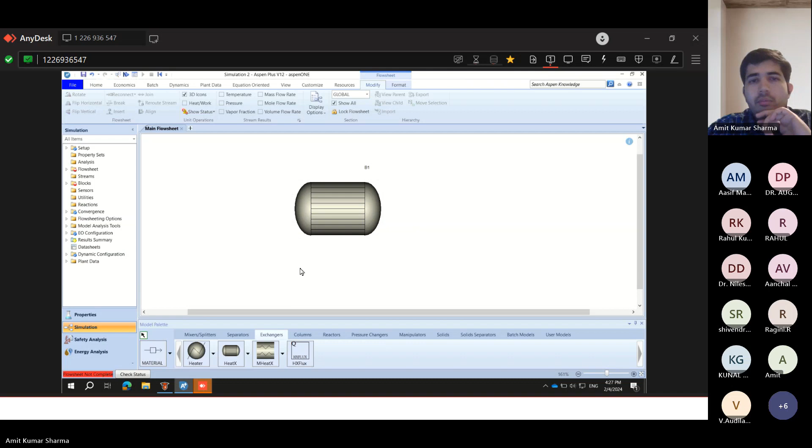Then the materials. We have input streams. This should be the cold stream, and this should be the hot stream. So which one is the cold fluid? Propanol, make it PROPIN. So it is the cold fluid. Then type it PROPOUT.

Then we have water in and water out. So you have connected all four streams. Try to rename the streams, otherwise you will get confused in the stream results when you analyze. It's only a single block now, but if you have a complete flow sheet of different components, it will be very confusing without names for each stream. So make it a habit: always rename the streams and rename the blocks. Like it's B1 only, so you can type it HeatX. It will be easier for you at the end to analyze the complete system.

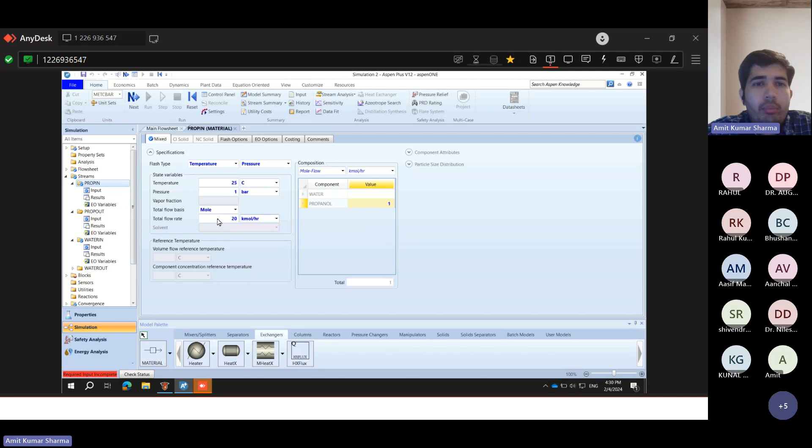For the propanol, we need to change it. Actually for propanol, the input we entered was 1 here, but here it's mole flow with unit kilomole per hour, so it will confuse or give an error, because here we gave 20 and here we gave 1. It's not in correct form, so make it mole fraction and make it 1.

Next, now the Heat X. Be careful here. You have to do the shortcut calculation. You have multiple options: shortcut, shell and tube, kettle reboiler. Click on shortcut. Then you have given the hot fluid is on the shell side, click on this. Then you have given the flow direction: is it co-current or counter-current? Which one is it? Co-current, co-current.

Counter-current, I think one of you is saying counter-current. Please check. Yeah, counter-current, okay, so it is given counter-current. The last line said counter. So the flow direction is counter-current. Be careful with this data, otherwise you will get different results. So it's counter-current.

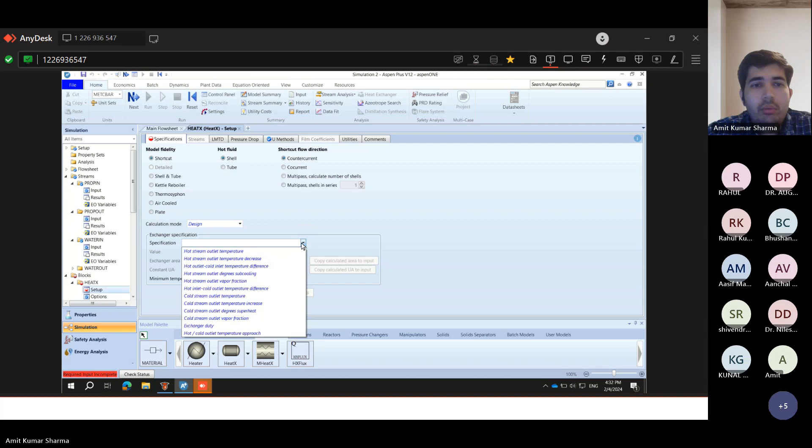Now we have options. So what do we want to do? If we are doing the shortcut, then basically we are doing the design calculation, so we can specify what we have given. We have given the exchanger duty. Go to specification, then find exchanger duty, so we can define this. And what is that exchanger duty? 30 kilowatt. So 30 kilowatt is exchanger duty. And what else have we given? The temperature approach, LMTD correction factor.

If you don't enter the LMTD correction factor, but still if you see very carefully, you don't see any red circle, it's red and half white. So basically all inputs are complete, you can do the calculation now. Let's try it. Yeah, all required input is complete, you can run the simulation now. Click OK, so the system is running. We have results, go to the result summary.

So we have results. The temperature of input is 25, but the output is 56, and water in is 90, and the output is 62. So we have some heat exchange here.

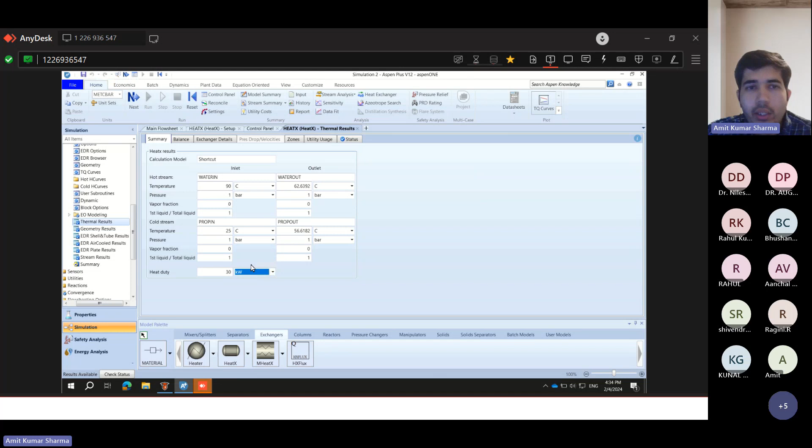Okay, and if you go to the HeatX, then you can see the thermal results. It's doing 30 kilowatt of heat duty, and with this duty, it's doing this calculation.

You can see the geometry results, and you can see the other details also, like exchanger details. So the duty is this one. The required area is 0.99. Actual area is 0.99.

So UA is LMTD. See, the LMTD corrected is 35.4678. So you can't see the geometry results. So we did the normal calculation, so it doesn't show the geometry result and all.

So the point is that we have not mentioned this detail, 0.85, but still we are able to run the simulation. So be careful when you do this, try to enter all the details. If you don't specify that detail, it may be assuming something.

Okay, so that's why we need to specify that also. To specify that detail, it will be in the LMTD. So go to the LMTD. It's an optional input. If you define this input, your result will be more toward your desired results, otherwise there is some difference. So what is the correction factor? 0.85. So yeah, so you define the 0.85.

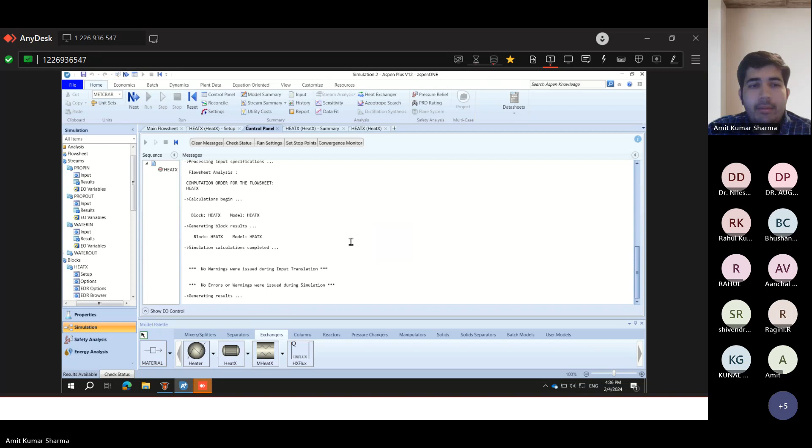Now see, now in some this is changed. So now click next, now again run it. So now we will have some slightly different result. Let's see, so it's 25, 56. So it's still near to that, but now your result is as per the given problem.

Otherwise, maybe the heat exchanger LMTD correction factor was maybe 0.82. If you calculate from that data, maybe 0.86, something like that. But you have to specify clearly. So that's the point actually. Always specify everything that you have with you. Maybe your system doesn't require that input, but if you have that data, you need to specify it. That is the main point.

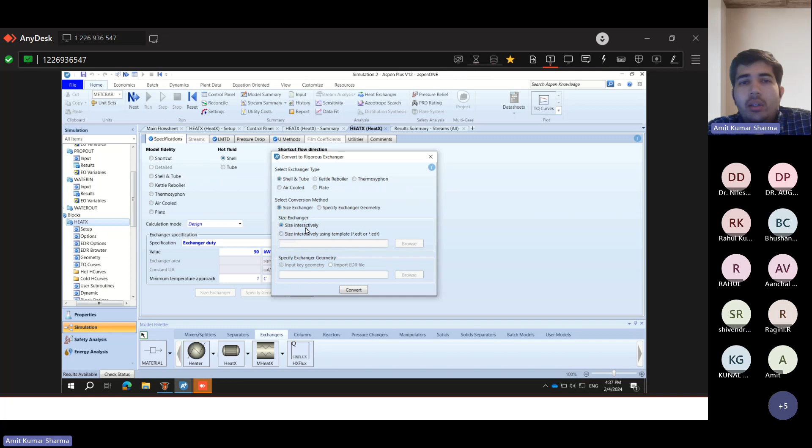Now we have defined everything. So if you want different calculation, if you click on shell and tube, then you can choose the size and all, you can do those things. So let's click on convert.

So now see, you can do the sizing and all things, and specify these things. So see, this kind of exchanger is this. So you can specify, you can change the things. Currently, with the current result, we have these kind of things. So you can see the result and you can change the data and you can pick the design and you can see the different results and all. So these kind of things you can do.

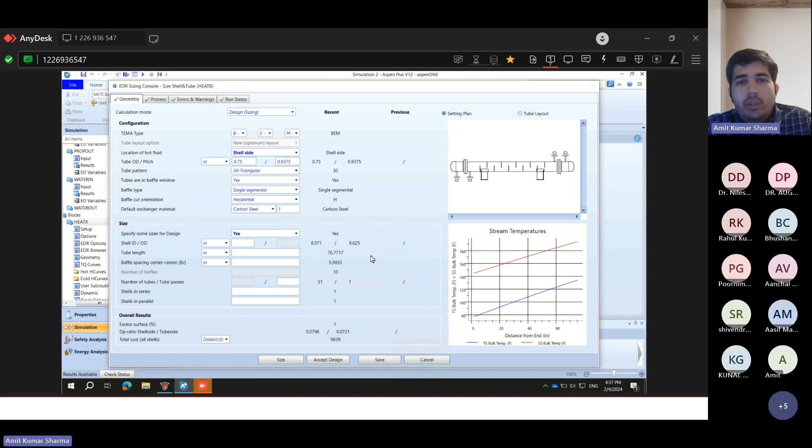So actually, you need to do it yourself. Try to find some theoretical problems from some thermodynamic books. The best way to learn software like Aspen or any similar thermodynamic calculation software is to take a basic thermodynamic book and find some good examples in that book, then try to model them through Aspen and verify your results from theoretical calculation and from the Aspen calculation. Then you will get to know more about how these things are happening, how the mass balance is happening, how the energy balance is happening.

So you can do that, or you can also find some good practice problems on YouTube, or you can refer some standard books also. Do as many problems as you can, then only will you have very good expertise in Aspen.

Yes, sir. Sir, anything else? You told us that you will provide us recorded session videos. Yeah, so these are my details, and I think if you have any specific question to me, you can email me. Okay, and regarding the videos...